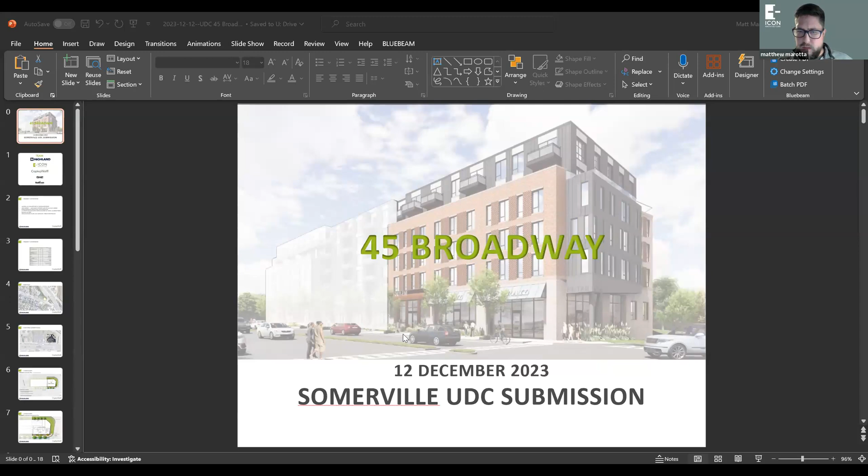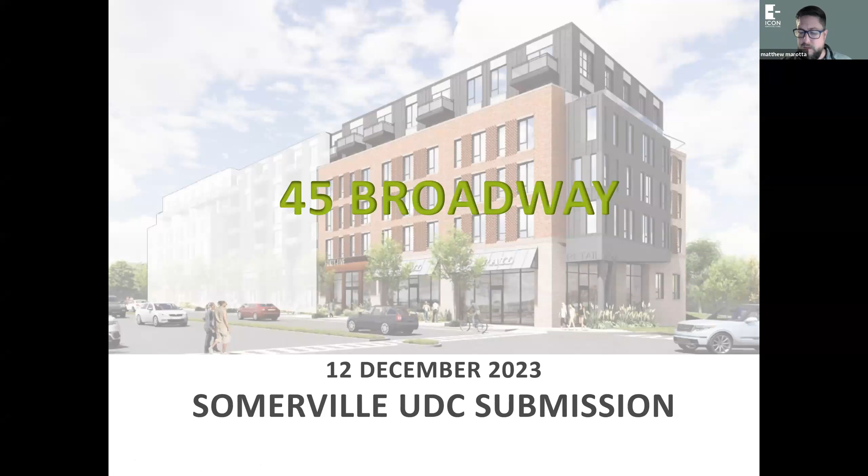So thank you once again for having us tonight. We have both 45 and 51 as separated projects, separate presentations, but as before, we also have combined views at the end for everyone to see. As we discussed last time, the team consists of Highland Development, Icon Architecture, CopleyWolff as our landscape architect, GM2 for site civil engineering, and Sullivan for attorneys.

As it was stated, we are in the MR6 district. We are proposing a 6-story multifamily unit building with ground floor retail and access to parking as well. I mentioned we are constantly aware of all the different requirements per zoning in the form-based code and are tracking them as we develop the project and making sure that we meet all the requirements necessary.

And Allison, if you don't mind, I'll turn it over to you to talk a little bit about context and some of the landscape adjustments that we have made since the last meeting.

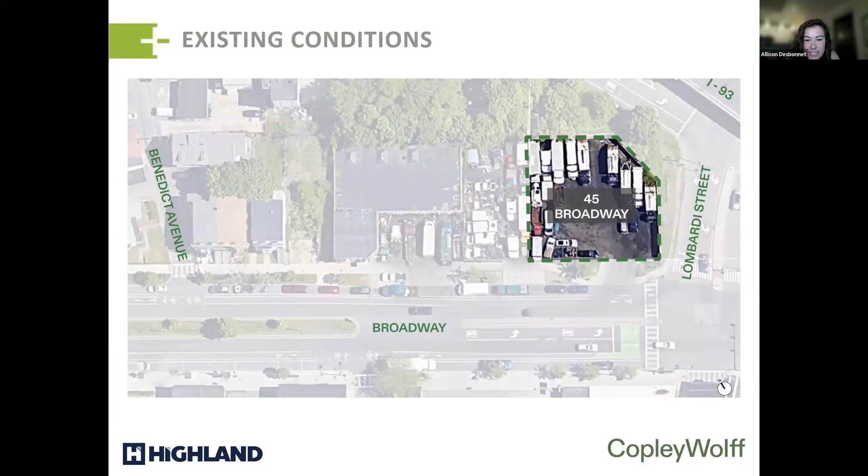Sounds great. Thanks, Matt. So I think we can probably skip ahead. Here's just showing the existing site conditions, which we kind of ran through in more detail during the first round. So diving into what we're showing here, this is our previous landscape plan that we presented last month. When we met during last month's hearing, we received feedback from the board on a couple items that we've addressed, shown in the lower left-hand corner there.

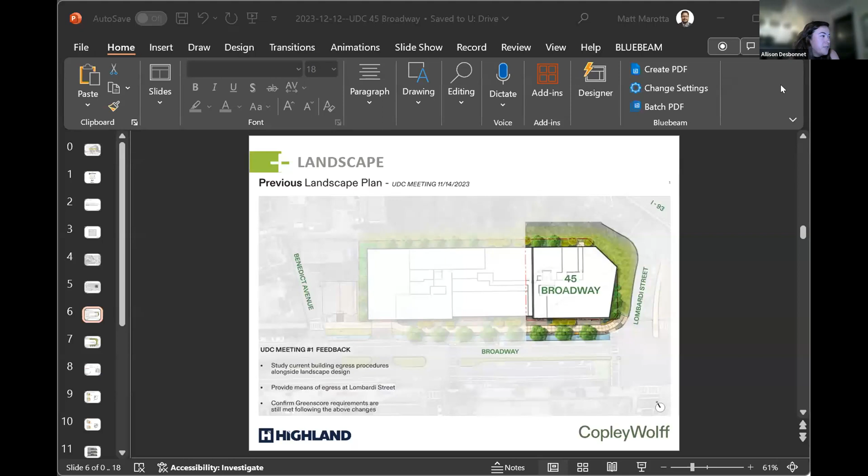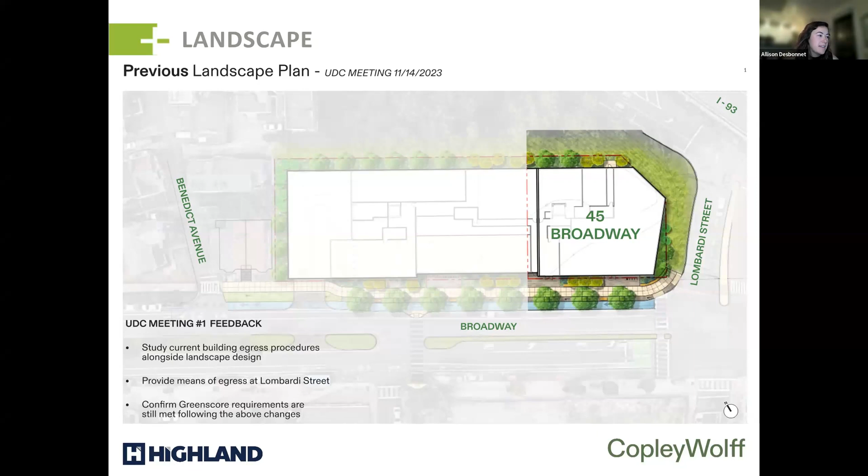So running through those. The first request was for us to study the egress shown along the north side of the building. So we were previously showing a concrete pad there, and we were asked to look into the feasibility of that and how the pedestrians would connect to the street. We were also asked to look into providing a means of egress instead along the east side of the building out to Lombardi Street. And then the last request was for the green score, just knowing we were making these plan changes to the egress, would we still be passing the threshold? And so we will go over that as well.

So you can just flip to the next slide. So this is our new proposed plan here. This shows our modified design, which you'll see eliminates the need for the egress on the north side. So instead, the pedestrians will exit to the east and follow a path graded at less than 2% slope out to the Lombardi Street intersection. We think this is much safer and more direct than the previous iteration. And Matt will go through how that works on the interior.

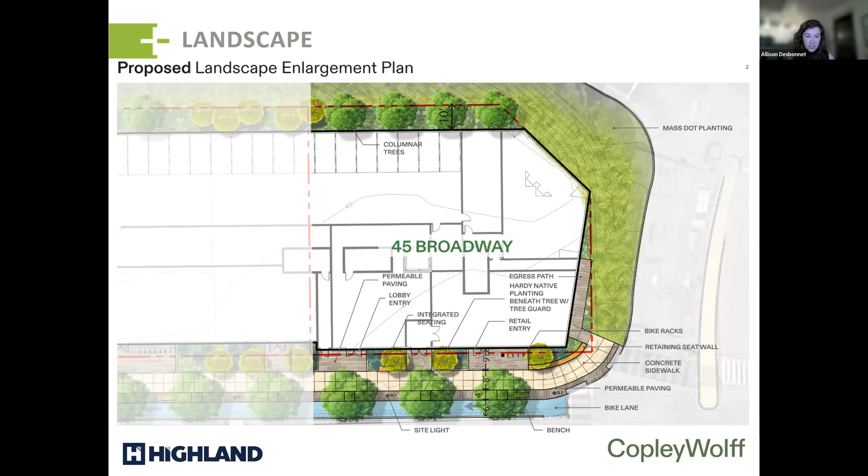And then going to the next slide, this is our green score diagram and scorecard that we were asked about last month. So for 45 Broadway, we're aiming to exceed both the required and the target scores, which has been achieved in this design. As you'll see, it's 0.258 for this one. So any questions on that, we're happy to answer. But that was just a quick update on the landscape. I'm going to pass it over to Matt now.

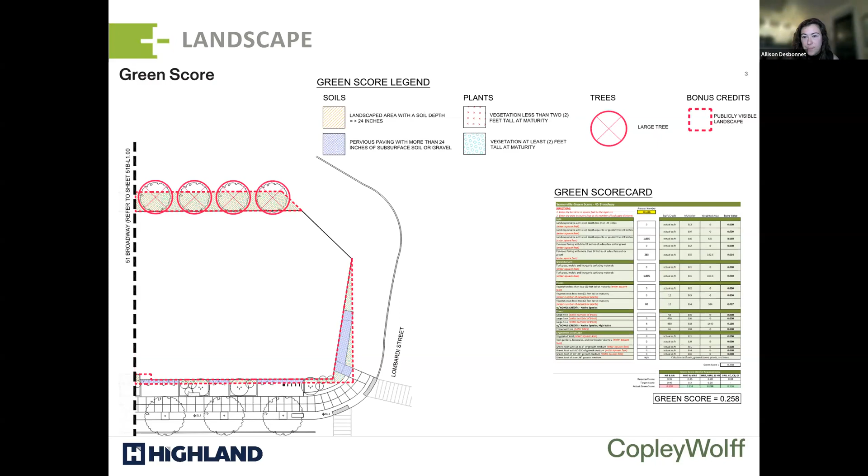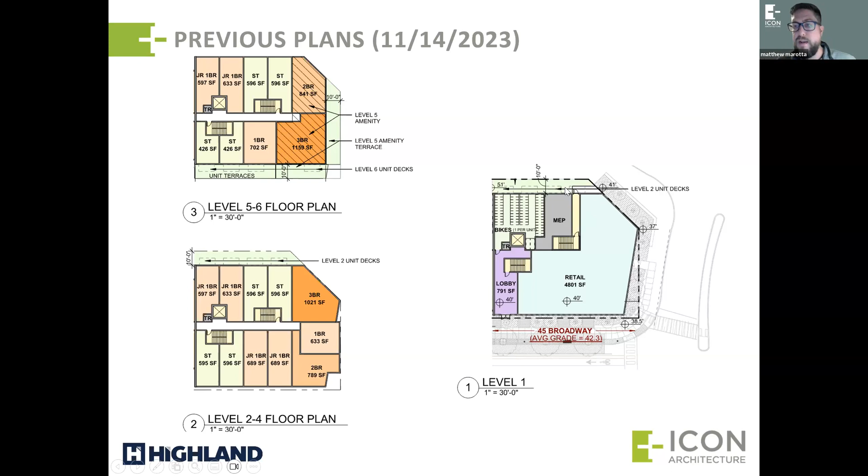Thanks, Allison. So the previous time we met, we did present the 3 different options. I think there was a general consensus that the board was very happy with option 2 overall, with a little bit of option 3 for some of the brickwork on 45 Broadway. And we'll present our combined design scheme to you tonight. A couple of quick plan tweaks that we've made. This is the plan that we previously showed you, which has the egress going out to the back side of the site, which was in question. In our new scheme, as Allison mentioned, we have relocated that egress and are egressing out towards Lombardi for a much cleaner, quicker connection, which will not interfere with the back landscaping whatsoever. A couple other tweaks were some bike room changes and parking changes at grade.